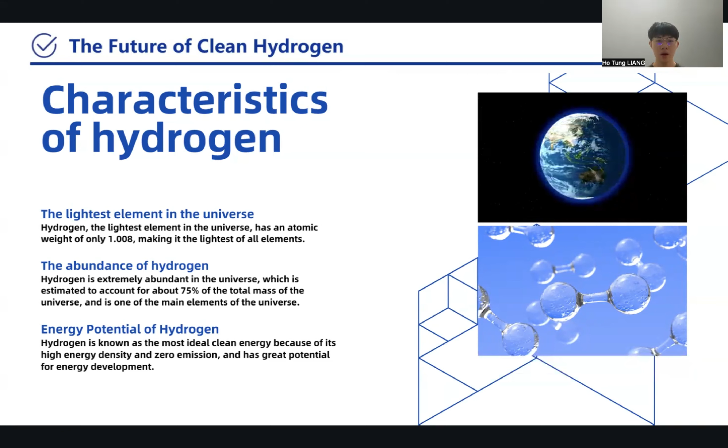From our research, these general scenarios explain a range of possible outcomes depending on certain underlying assumptions. For example, the degree of government support for hydrogen energy varies in different countries and regions. Then, infrastructure construction of sustainable aviation fuels is key to realizing the transition from fossil fuel to clean hydrogen energy. But there are uncertainties in the construction progress and coverage, which affect the overall decarbonization process.

Moreover, hydrogen-based synthetic fuels must show competitiveness relative to the major SAF alternatives, such as biokerosene, in terms of cost and raw material supply. This process is affected by technological development and market supply and demand conditions.

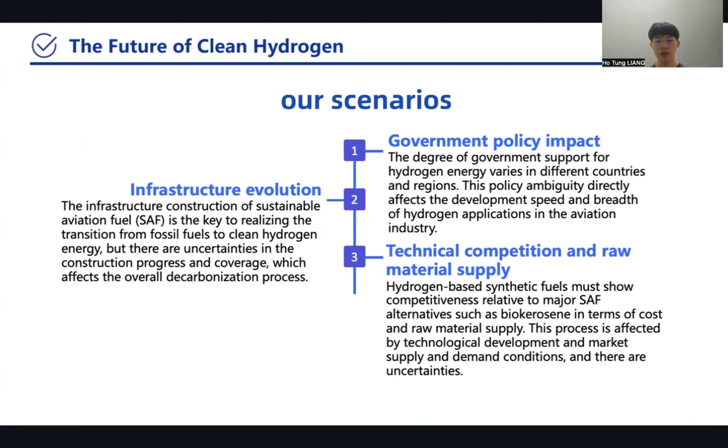From our data analysis, we predict that hydrogen demand will continuously increase over the next few decades. Nearly all hydrogen consumed today is gray hydrogen, approximately 90 million tons per year. However, demand for gray hydrogen is projected to decline as demand for clean hydrogen rises and the cost of green molecules eventually becomes more competitive.

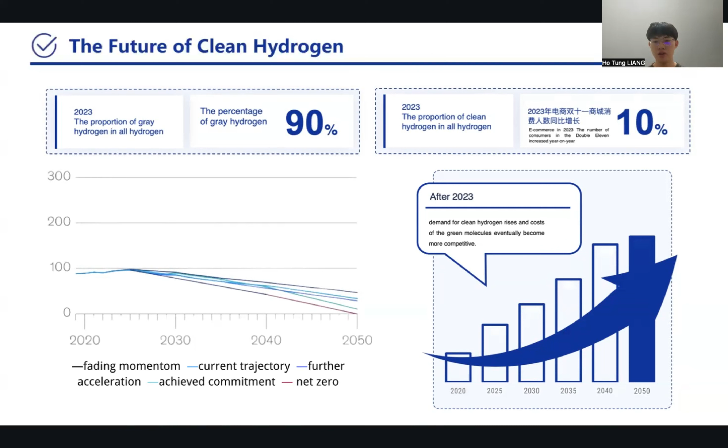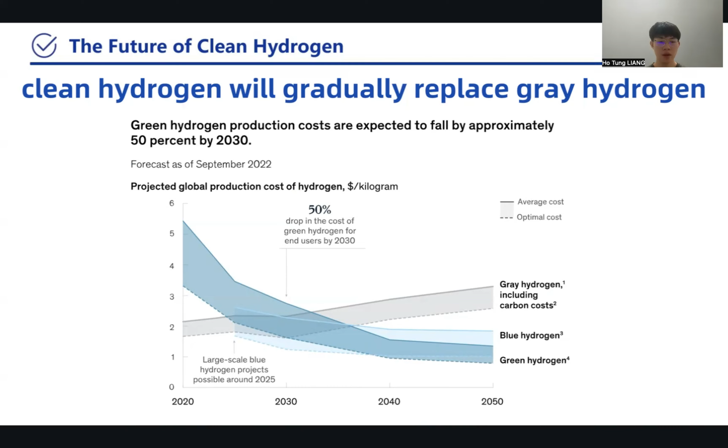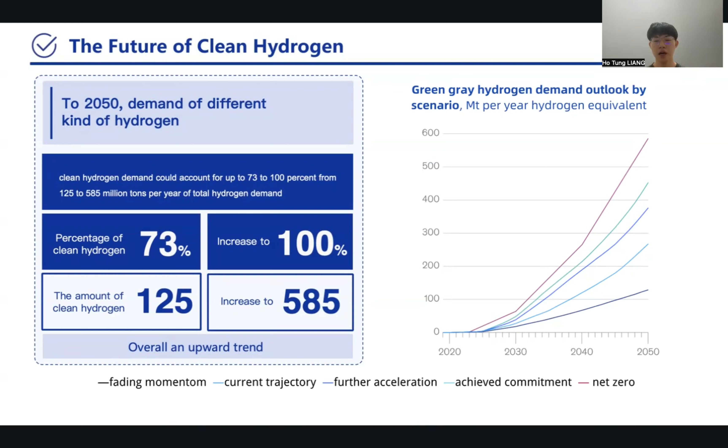After 2025, clean hydrogen production is expected to replace gray hydrogen. Existing applications will gradually transition to clean hydrogen until 2030, while new applications will drive demand after 2030 and 2040. By 2050, clean hydrogen demand could account for up to 73 to 100% of total hydrogen demand, ranging from 125 to 585 million tons per year, with only between less than 1 and 50 million tons per year of demand being met by gray hydrogen, depending on scenario.

Moreover, we found that industry is projected to drive the majority of clean hydrogen uptake until 2030, followed by wider uptake in new applications by 2050. We predict an increase in clean hydrogen share of total hydrogen demand from less than 1% today to around 30% by 2030 in the further acceleration scenario.

Combined clean hydrogen uptake in existing and emerging applications could drive clean hydrogen share of total demand to 77% by 2040. By 2040, clean hydrogen could play a large role in new applications, especially in mobility, which is expected to be the largest newcomer for clean hydrogen demand by 2040 in the further acceleration scenario. The second largest newcomer is expected to be hydrogen used in heating, displacing natural gas.

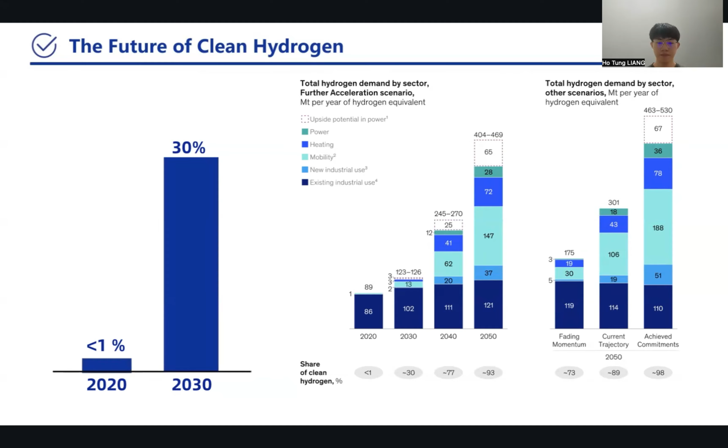Clean hydrogen cost competitiveness is projected to vary between regions. Production costs are expected to drop significantly by 2030 to 50%, with large differences across regions under the scenarios explored.

Cost differentials among regions could drive an increasing mismatch between the supply and demand centers, leading to the development of major hydrogen and hydrogen derivatives export hubs. Regions with cost-competitive natural gas resources and CCUS, such as the Middle East, Norway, and the United States, are expected to have higher cost competitiveness.

These regions could potentially account for 30% of exports at production costs below $1.5 per kilogram by 2050, while regions with access to lower-cost renewable power, such as Australia or North Africa, could make up an additional 60% of exports at production costs between $1.5 and $2 per kilogram. Growing hydrogen trade could enable uptake in countries that have strong decarbonization ambitions but lack the necessary energy resources for clean hydrogen production, such as parts of Europe, as well as Japan and South Korea.

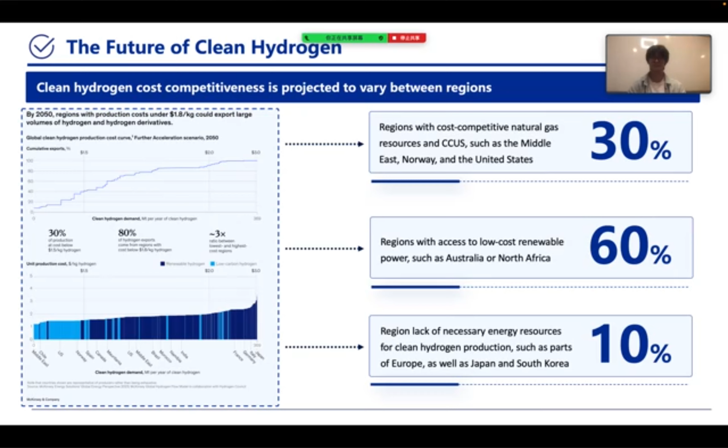The global hydrogen trade could emerge to connect demand centers with resource-rich export hubs. Major hydrogen trade flows are expected to evolve to connect export hubs with favorable renewable power or natural gas resources to main demand regions, Asia and Europe.

Europe could meet most of its demand from within the region, importing from countries with low gas prices or abundant hydro and solar power, such as Iberia and the Nordics. The remainder could be sourced from the Middle East, North Africa, and North America.

Asia could source hydrogen from countries and regions like Australia, Latin America, the Middle East, and North America. Regions with favorable routes to market, either by producing and shipping derivatives or building a strategic network of hydrogen pipelines towards off-takers, potentially reusing existing natural gas infrastructure, may also emerge as production hubs. While major trade flows in Europe will likely depend heavily on pipelines, shipping could prove critical to enable overseas trade.

Hydrogen shipping could be expedited by converting hydrogen to synfuels, such as ammonia or methanol, at the export hubs. Liquid hydrogen shipments could be one way to enable global hydrogen trade after 2030, potentially increasing to approximately 20 million tons traded in 2050 in the fastest scenarios.

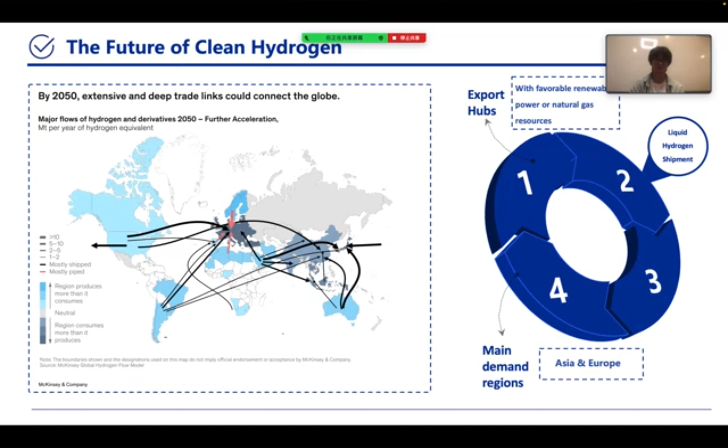Although this projected ramp-up of the global hydrogen trade is ambitious, it does have historical precedents, like similar growth observed in the first 25 years of LNG development. It is anticipated that in order to meet the demand for clean hydrogen in important sectors, infrastructure must be deployed in a timely manner throughout the full supply chain.

The future hydrogen economy will require the implementation of a number of essential enablers by 2050, the majority of which will involve physical infrastructure. A network of more than 40,000 kilometers of hydrogen pipes will be required in Europe alone, in addition to more than 163,000 truck refueling stations worldwide, under the Achieved Commitments scenario. Innovation in fields where hydrogen technology is not yet developed, including the creation of fuel cells for heavy-duty vehicles and marine vessels, may also be necessary to guarantee the adoption of hydrogen.

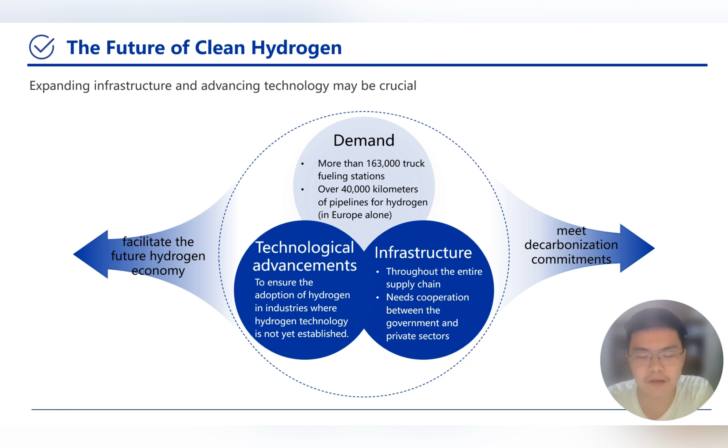To ensure that the infrastructure is in place to meet hydrogen demand at the rate required to meet decarbonization targets, and with a compelling business rationale, coordination between the public and private sectors may be necessary.

Asia is predicted to remain the largest consumer of hydrogen across all scenarios, notwithstanding uncertainties in regional and sectoral demands. This demand is mostly driven by the need for chemicals that are currently on the market, and to a lesser extent by the transportation, iron, and steel industries in China and India, since ammonia and hydrogen are combined in current coal and gas plants, respectively. A sizable portion of the hydrogen demand in Japan and South Korea is anticipated to originate from power production. Asia may have to rely on imports from the Middle East or Oceania, for example, as the region is unlikely to create enough hydrogen to fulfill its increasing demand.

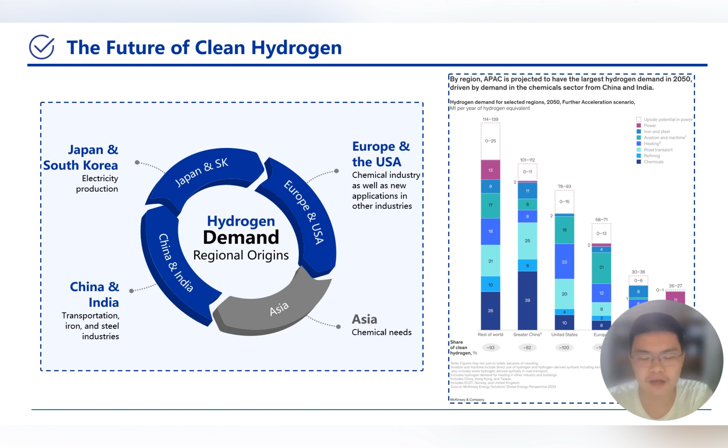The chemicals industry is expected to continue to be a major driver of hydrogen demand in both Europe and the US, but new applications in the steel and synthetic fuels production sectors, as well as in aviation, marine, and heavy road transport industries, are also anticipated to have a major impact on demand growth.

Green hydrogen is predicted to account for between 50 and 65% of the world supply mix by 2050, depending on the scenario, due to cost savings in electrolyzer and renewable energy sources, with a projected share of between 20 and 35% of the supply. Blue hydrogen is expected to come in second.

It is anticipated that the ratio of green to blue hydrogen production will vary greatly by region, mostly due to advances in cost factors. It is anticipated that the production of blue hydrogen will be concentrated in areas like the Middle East and North America that have CCUS and natural gas at a competitive price.

The generation of blue hydrogen may require up to 500 billion cubic meters of natural gas by 2050, which in the further acceleration scenario accounts for 10 to 15% of the world's natural gas demand, as well as the ability to absorb and store 750 to 1,000 megatons of carbon dioxide.

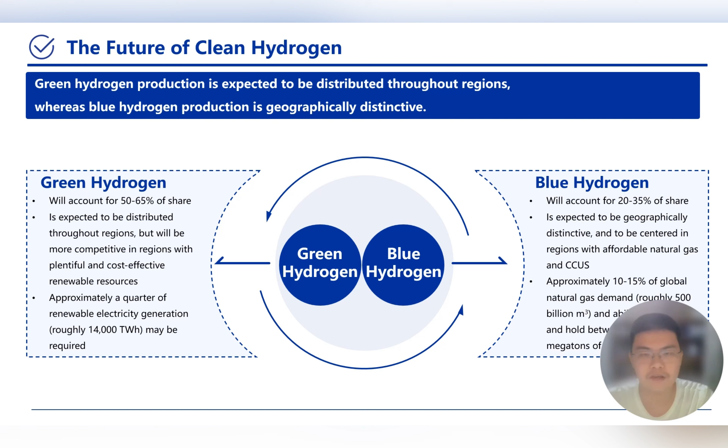So, in conclusion, hydrogen is a versatile energy carrier that has the potential to play a significant role in decarbonizing the energy system, and hydrogen-based technologies can provide low-carbon alternatives across sectors.

However, as of now, there's still a wide range of possible hydrogen pathways up to 2050, both in terms of hydrogen demand and supply, leading to uncertainty for organizations looking to enter the hydrogen market or to scale their operations. Government and private sector support is projected to heavily affect hydrogen uptake.

At the same time, future technological development of alternatives, like for instance high temperature electric furnaces, long duration energy storage, and availability of bio-based feedstock, could also create competition in some of the new applications for hydrogen and hydrogen-based fuels. Hydrogen companies may benefit from closely monitoring the signposts on policies, the development of hydrogen enabling infrastructure, and the cost competitiveness of hydrogen-based technologies compared to other low carbon alternatives, as they chart their way forward.